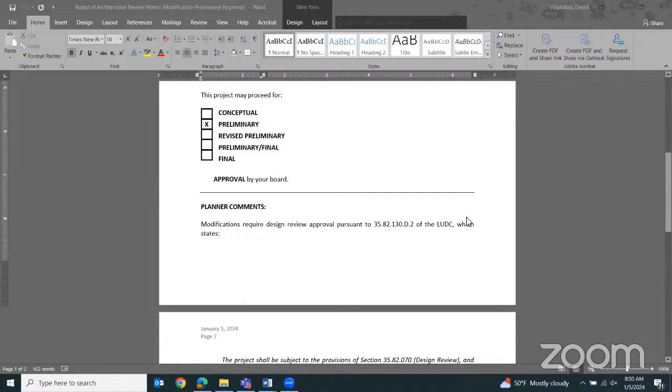There's a memo from Veronica King, the planner, that says modifications require design review approval of the LUDC, which states the project shall be subject to the provisions of the design review section and shall be scheduled to be heard in front of the Board of Architectural Review for preliminary review and approval only before the project is heard by the zoning administrator. The modification, we must make the finding that the modification is minor in nature and will result in better architectural or site design as approved by the Board of Architectural Review. So that's why it's in front of us, even though it's a very minor modification.

Looks like the applicant is here. Brett, would you like to come to the podium briefly? Item C2 is located at the request of Brett Ettinger, the agent for Glazer-Miskulin Living Trust. It's located at 915 Camino Medio, and it's here for preliminary and final on consent of the modification approval.

The previous comments were just in support of the project. So Brett, if you can state your name and whether anything's changed since the last time we saw it. Good morning, my name is Brett Ettinger, Ferguson Ettinger Architects. Nothing has changed since the last time we met here in December.

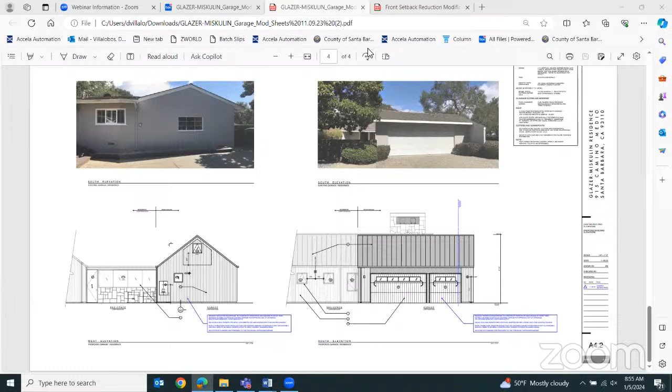All right, and then we'll move on to C3. I would really like Alex to be here for item C1. So thank you, Brett. Thank you, guys, have a nice day. Anybody not here today, you know, David? Hey, Robert.

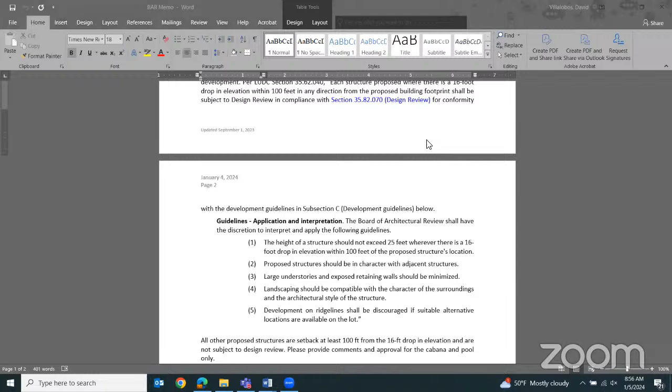So there's a memo for C3 as well. Is the applicant for C3 online? Let me pull up the participants list so I can see when they're there.

Moving on to item C3, at the request of Kate Svensson, agent for Roblata LLC, George Behar. The project is at 4629 Via Roblada in the Hope Ranch area.

It's here for conceptual, oh no sorry, is this incorrect on our agenda? It says final, it says conceptual review, but we already did conceptual review. At the bottom it says may return for preliminary final. I just want to make sure.

Just to jump in, this is Tatiana the planner. It was asked to return for preliminary final on consent, so that's what it should read. Sorry, I can't see the agenda. So it's here for prelim final on consent, and there's a planner memo that we'll read through.

Only the proposed pool and cabana, also labeled as gym and sauna, are subject to design review due to being within 100 feet of a 16-foot drop in elevation, considered hillside ridgeline development. Each structure proposed where there is a 16-foot drop in elevation within 100 feet in any direction from the proposed building footprint shall be subject to design review in compliance with the design review section for conformity with the development guidelines in subsections C. I won't read all of those guidelines, but can you keep scrolling through, David?

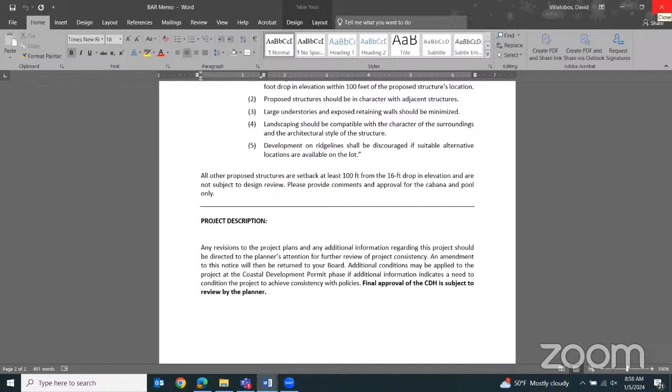All other proposed structures set back at least 100 feet from the 16-foot drop in elevation are not subject to design review. The final approval of the CDH is subject to review by the planner, so we are only looking at the pool and cabana structures.

Alex, we're on C3, and then we'll go back to C1. I just was waiting for you to get here for that one. So the previous comments were that the board is in support of the proposal, and that's it.

Kate, if you could state your name and anything that's changed since the last time we saw this. Kate Svensson, designer for the project. No, nothing has changed at all. We do have Michaela Colvin on the call, and she's the one who worked on the landscape plans for this project as well. If she could also address the landscaping development around the cabana, I think that would be helpful for the board. But the set you're looking at is the exact same set you saw at the conceptual hearing.

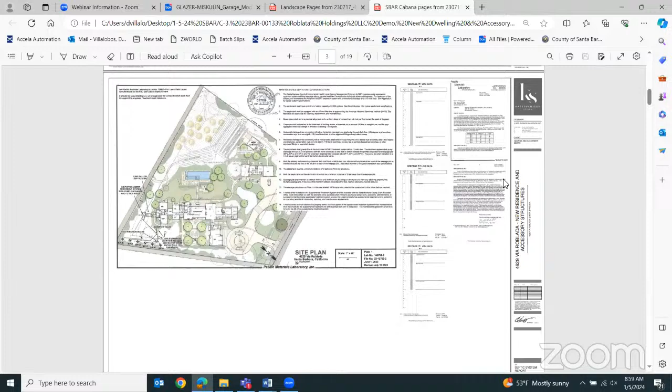Can you direct us to scroll to which sheet has a blow up of the pool and cabana area? I don't know which set you have, I think it'll be towards the end, way down in the set, because you probably have the full building department submittal set in front of you. Okay, I guess I edited for you. No, go up.

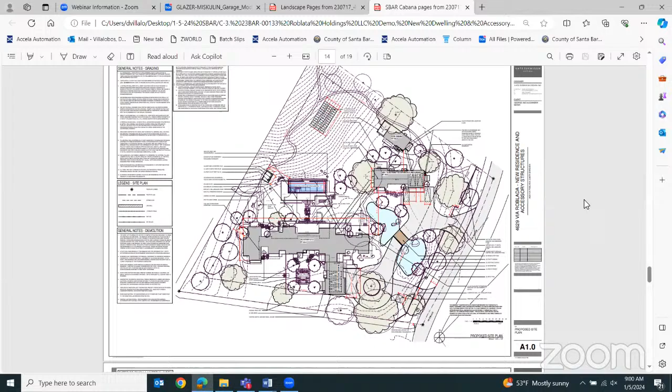So overall, the site plan, you guys can see the pool cabana on the top right of the property, and if you scroll down, you'll see the floor plans and elevations for the cabana right here. The next sheet will show you the elevations, the floor plans are there.

I was looking at the page with the elevation, with the windows, and there were some glass openings. Where do they occur? They all face, you can see on the floor plan, the north and east sides have the two large openings. So the north bifold door faces basically the hill and the ocean, and the one on the east side of the project faces the other structure on the property, which is the ADU. So both of them are away from all of the surrounding neighbors.

There's one with big glass, it says not in window schedule. I think it's on the next page. So the two doors you see on the floor plan right now, if you look on the top right portion of the page, there's two large corner openings. Those are bifold doors, not windows. Right, but these are fixed glass, and it has a truss shape in the frame. That's for the main house only. Oh, that's the main house, okay. Below the floor plans here, you can see the window schedule and the door schedule.

Only ones applicable to the cabana.

I was just impressed by the number of pages on this set. I thought it was like 35 pages or so, but no, we're at 178 for the whole development. It's a large book to read. No, it's well detailed. I have no comments.

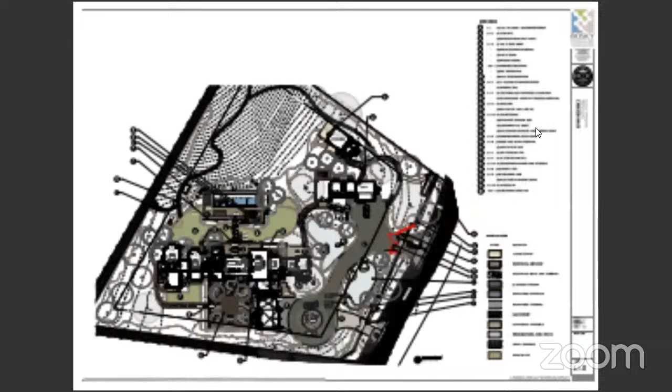Hi, Michaela Colvin with Bosque Landscape Architecture. Could you fill me in what was presented previously? The LUP set, basically, so it's only applicable to the cabana and the pool, but we really only reviewed the cabana because it's within a 100-foot setback. So we're just looking into the area with light landscaping around the cabana and screening for the neighbors.

So we have around the whole property kind of large native screen shrubs, and some oak trees going around the perimeter, trying to densely screen from the neighbors and the street. Down the slope we don't have too much planting, just a Mediterranean and native palette at the top of slope. We have some olive trees in between the cabana and the ADU.

Is there a planting plan here that maybe you guys can scroll to? It should be 2 or 3 sheets below this one. I can share my screen if you don't have it. So you can see at the fence line we have 2 or so layers of large native screening, and then minimal planting in between the ADU and the cabana.

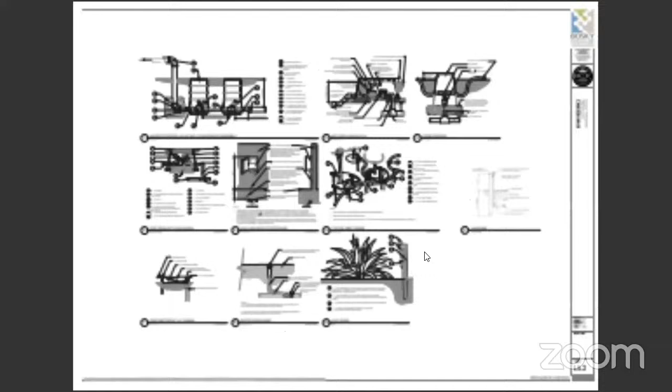Are you proposing any landscape lighting? Yes, just minimal for path of travel. Do you show it on here? We have some on the lighting plan, a couple sheets below this one. We have 2 more irrigation plans and then should be lighting. Here we are, so you might need to zoom in to see the symbols, it's a pretty large plan here.

We'll just focus around the pool area since that's the only part in our purview right now. So yeah, we don't really have much lighting around the pool, just some path of travel lighting to get you to the pool area.

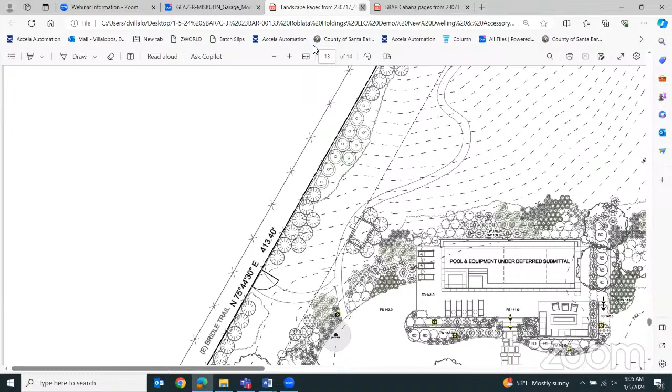Sounds good. Any other questions, Alex? Yeah, I think it all looks good. So we'll give it a final approval in the normal agenda item once we're there, but you don't have to wait around for it. Thank you. Great, thank you.

Okay, the applicant here is... Eva, are you here, or who's presenting? Oh, Dylan, yeah. Hi Dylan, how are you? Good, good. I looked at the plans previously, you made some changes. Can you go over the changes? I know you changed the trellis and the patio and the side walls. Can you show us where they are?

Absolutely, absolutely. So I think the best place to start would be on page 12 of the PDF, which is A2.3, the roof plan. Alex, I really appreciated the comments you made previously, and there are a couple things we addressed based on those comments. One, I reduced the pitches of the roof. One comment was that some of the roofs felt over pitched relative to the design concept, and I appreciated that comment.

So we did revise those pitches. The comment was that there was a flat roof that felt like an addition, so we changed that to a gable, a cross gable. In this lower portion of the screen you'll see we created a 3.5/12 tied into a 4/12 roof on the rear portion of the house. We eliminated the portion of the trellis to the south over the breakfast deck, and just have that trellis coming off of the great room. If you'll go to page 15 of the PDF, please.

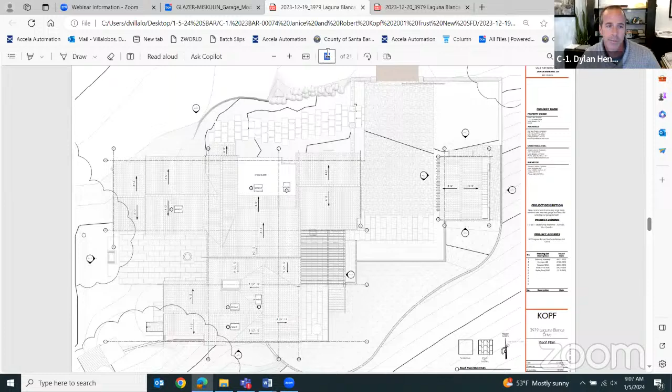This is the rear elevation where you can see the reduction of the pitch of the roof over the great room, the change to a gable at the office area to the left of the great room, and then the revision to the trellis, which is now just over the great room. I think architecturally it works quite a bit more successfully.

One comment from another board member was that the span of the material didn't look like it was working. You can see in the view above, on detail 2 south elevation, we are breaking that span with a cross beam. I've confirmed with structural that the spans on these trellis members will work just fine.

And then for perspective views, if you go to page... Were you going to say something? No, what page are the perspective and front views on? Go to page 2 of the PDF, please.

The lower right perspective view shows best the changes we made to that portion of the project. I appreciate the comments. We made some pretty significant changes, and I think it's caused a more successful architecture. Well done, Dylan.

Was it to minimize and reduce hardscape and side walls? I think you did change the side walls a little bit, didn't you? Yeah, so I'm going to turn this over to Michaela, who's with us from Bosky, and she's going to take us through the landscape drawings.

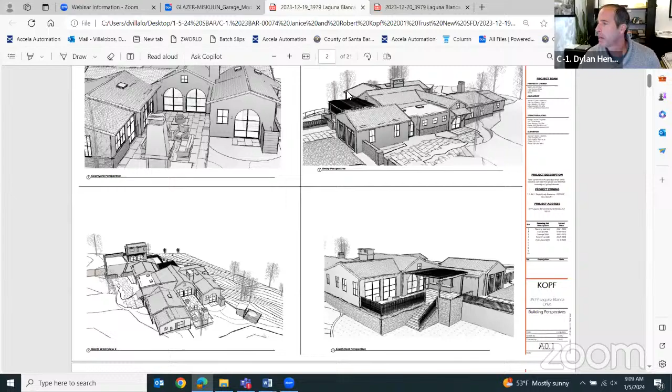They're 2 separate submittal sets. If you go to the 3979 tab to the right on the PDF, up at the top. I'll turn this over to Michaela. Hi. So we are looking for the landscape layout plan.

These look like the civil sheets right now. It starts on page 7. Yeah, it keeps going in the PDF. Yep, there you go. Just go one more down. There we go.

If you look at the curved site wall, we have reduced the number of site walls. We used to have 2, so we've removed the lower site wall and increased the remaining site wall from 4 feet to 5 feet. We've also added some boulders below that site wall to help naturalize the steepness of the grade we're going to be grading, to make that all work. So it's reduced to one site wall at 5 feet high.

At the motor court, we have also pulled in the entrance wall leading to the front door more towards the rest of the motor court, so we've reduced the size of that. And to address another comment about the pathway to the front door, we've now made that permeable stone paving, and we've pulled it away from the existing oak tree.

Good, I was going to ask, this is the landscaping plan, right? Yeah, I think that addressed all the direct comments. Let's scroll through the planting plan.

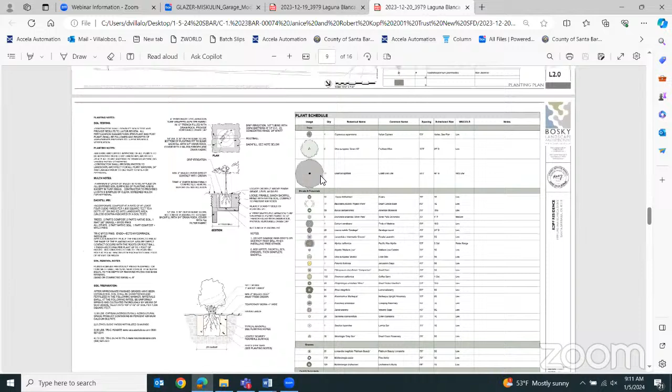Kayla, what shrubs are you proposing at the base of the retaining wall? Let's see, we have some Salvia Waverly, some Muhlenbergia Lindheimeri, some Muhlenbergia dubia, little ollies, some lavender, and also some rosemary, it looks like.

Any landscape lighting on this one? Yes, just some minimal path of travel lighting. Any other questions, Alex? Yeah, I think everything looks ready to go. All right, thank you. Thank you.

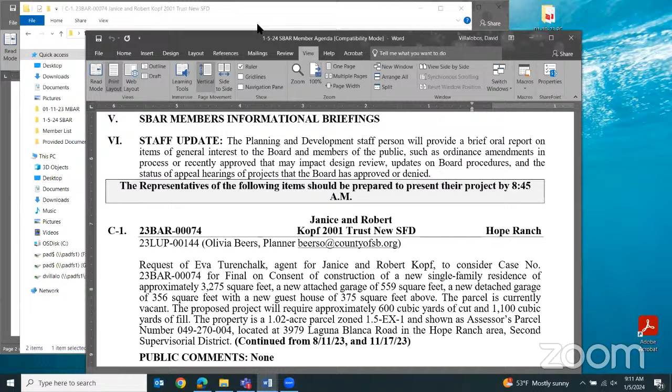Let's begin with item number 1, public comment. Is there anyone from the public that would like to speak on an item that is not on the agenda for today? If so, please step forward. I think we have one. We have one for the minutes, but not this portion. Okay, very good, so that concludes public comment.

Item number 2, elections for chair and vice chair. I nominate Kalie Grubb for chair. Any other, we do them one by one, right, not together? Yeah. So any other nominations for chair? Okay, great. So we can vote. All those in favor? Aye, aye, aye. Opposed? Motion carries. Kalie Grubb is the new SBAR chairperson.

Well done. Okay, so for vice chair, I'll nominate Alex Pujo. Any other nominations? Okay, all those in favor? Aye. Opposed? Motion carries. And I will now turn it over to Kalie. Thank you all for the last 3 years. Thank you, Chris. Thank you, Chris.

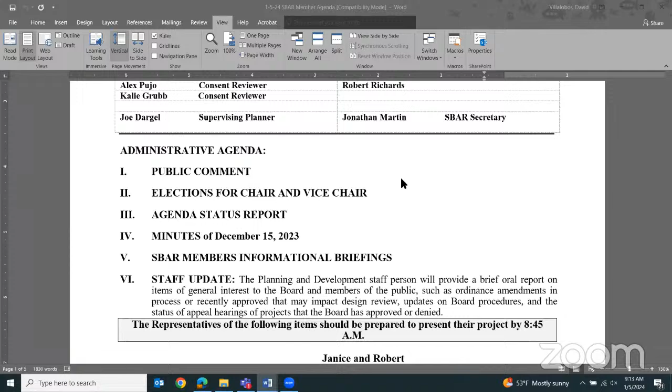All right, we'll move on to reviewing the minutes from December 15th, 2023, and we have one public comment or request to speak, so we'll hear that before we do the review. Would Michael Guten like to speak?

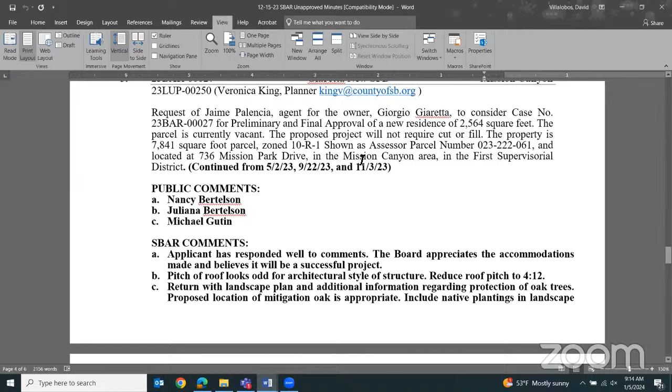I think you folks remember me, that I've attended all the meetings before. I'm concerned about the large house that's being built 7 feet away from my house.

I have some comments about the last meeting I'd like to make. Prior to your voting today on whether to approve the minutes of that meeting, which include the preliminary conceptual design review of agenda item number 5, I'd like to make the following points. First, agenda item number 5's unapproved minutes refer to this project as preliminary and final approval, but that is incorrect, as this project was only being heard for preliminary conceptual design approval, not final approval. I'd like that changed in the minutes, if you don't mind.

The applicant surprised everybody at the 12/15/23 hearing, including the SBAR members, with a revised set of plans dated 12/4/23, which were downloaded right at the hearing, which no SBAR member or any of the public had any opportunity to adequately study or comment on.

The 12/4/23 revised set of plans changed the roof shape from a hip roof to a gable roof, with a pitch from 4:12 to 6:12, and a height from 23 feet 5 inches to 25 feet 4 inches, which made the house even taller than before.

The result of the change in roof shape, pitch, and height is more shading of sunlight and blocking of views from my house and backyard, and a more overshadowing presence of such a large 2-story house erected just 7 feet away from my much smaller single-story house.

In the previous set of drawings, at the request of the SBAR and affected members, the roof shape had been changed to a hip roof from a gabled roof, and the roof over the master terrace on the 2nd floor had been deleted completely.

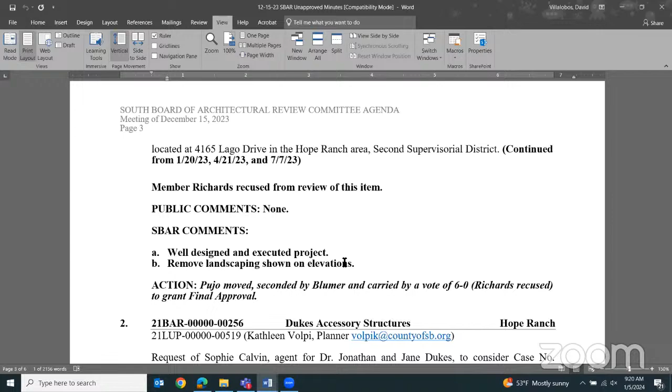Item C1 was continued. Does anyone have any revisions to item 1? Item 2 was continued. Item 3 was approved, will be approved as a consent item today. So that's item 4.

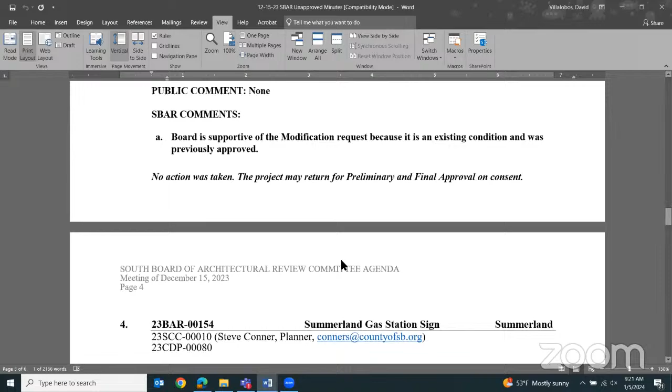I think on number 4, I don't know that the comment was that the light spill wouldn't occur beyond the property line. I think it said it wouldn't negatively impact the neighborhood. There's going to be some light spill coming out of any lights in a canopy. I think it just says demonstrating what light spill will occur. Okay, I agree. Anything else for 4? No.

Item 5, wait, oh, non-trip material. That wording, okay, you think? I digress. Yeah, non-trip is a little... yeah.

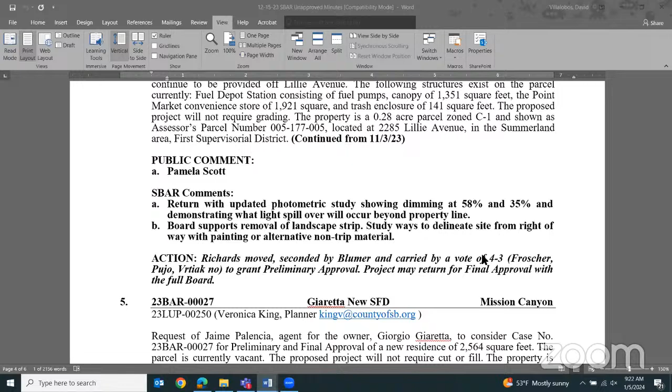All right, reviewing item 5. I'd just like to confirm that the plans we reviewed were submitted to the planner as part of the record. Which is part of the...

Just for item C, increase width of planter for hedge to 2 to 3 feet. I don't think 2 to 3 feet was said, I think I said a minimum of 3 feet. Increase width of planter to a minimum of 3 feet. Yeah, and it also went along with the decking - it was to reduce the amount of decking in order to accommodate the increased width and provide better privacy screening, and that was along both side yards.

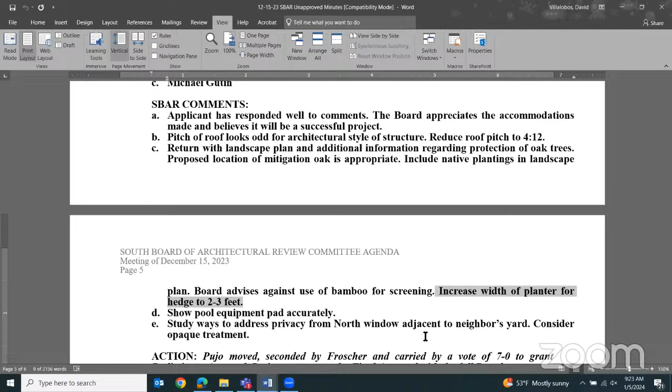Mr. Chair, I have a question. Our typical policy is when projects are agendized for any kind of motion, like a preliminary or final approval, that we don't accept plans that haven't been submitted properly. So I'm curious how we got to that on this particular project. That gentleman spoke about it, and I'm reading the minutes and seeing we had it agendized for a possible motion for preliminary approval, and then we took in plans at the last minute. That seems inconsistent with how we've operated in the past.

In that hearing, if I remember right, the plans had been submitted but the planner hadn't put the correct plan set in the box. I'd like to confirm that, I wasn't there so I'm not sure. Yes, Madam Chair, I could jump in here. The planner was out during that hearing, and I was aware of the plans that had been submitted, so we allowed them to provide the plans because we didn't have access to them at the moment, but the applicant had submitted those plans.

So they had been correctly submitted, but we had not had time to previously review them. So were they available to the public after they were submitted? Yep. And how many days before the hearing was that?

They would have been made available to the public if the public had requested them. Yeah, just like a standard practice.

Okay, and that was prior to the hearing? That's correct. Can you estimate how many days prior? I believe it's 7 or 8 days prior to.

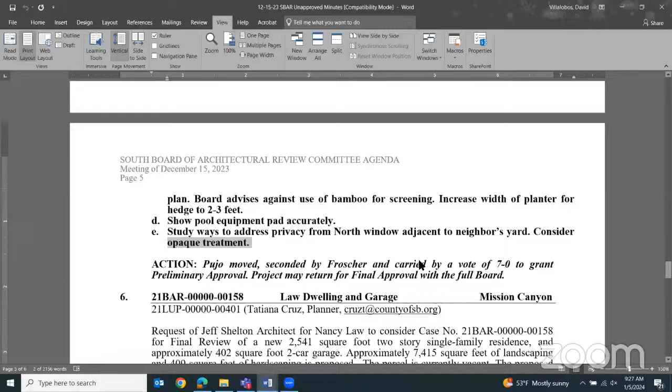Okay, I'd also like to go back to item 4 real quick. When we discussed the removal of the landscape strip, this is item B, we also encouraged the community of Summerland to, I guess, yeah,

I see a bench, right? Is that what you said? Well, something like a planter in the right of way, to encourage the community of Summerland to petition the planning commission to have something sort of barrier placed. Yeah, barrier or planter in the right of way, because it's outside the applicant's property.

So that was just one of the things that we talked about when we supported the removal of that landscape strip. We still thought there was a safety concern. So, for what it's worth.

So the idea was to petition, it would be Public Works. So what would be the process for the applicant to do that? To get an encroachment from Public Works to add the planting strip. The sidewalk was wide enough, was like 8 or 10 feet.

Sidewalk was wide enough, of 10 feet, and we thought like a 2 or 3 foot planter. I don't think it would be the planning commission. I think it would be an encroachment, right? From Public Works, I imagine.

As far as our comment goes, we just encouraged, we made a comment that wasn't really directed at the applicant, for a solution in the right of way. Yeah, it's encouraging the community to take matters into their own hands. Yeah, so I don't think we have to clarify what agency it goes through.

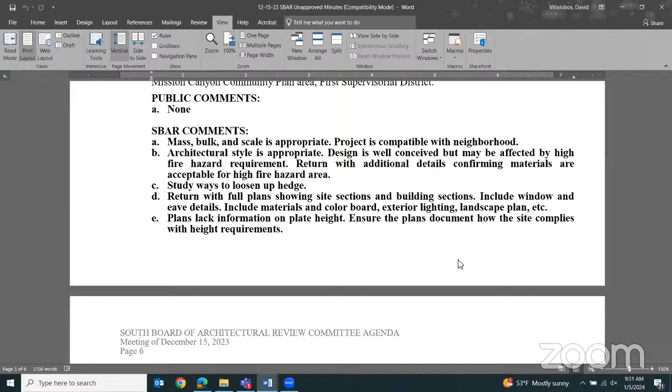What is loosen up hedge? As a landscape comment, how do you loosen up a hedge? By forgetting to prune it.

I can't say it's my project, but I understand it. I think the comment was to informalize the hedge so it wasn't in a straight line, so maybe use staggered planting instead of a straight line of planting. They study ways to make the hedge less formal.

I think for item 8, the comment was to consider addition of a deck and reduction in height of wall. I was just making a recommendation that the applicant could consider using a deck and a railing system instead of the walls to try to accomplish getting that outdoor space. So maybe it should be consider the use of a deck and railing system as opposed to the retaining wall system.

It seemed like it was an inefficient way of trying to accomplish the outdoor space to me, as an alternative to the retaining wall system. Did you get that, Joe? Yes, I got that. Is there no other changes?

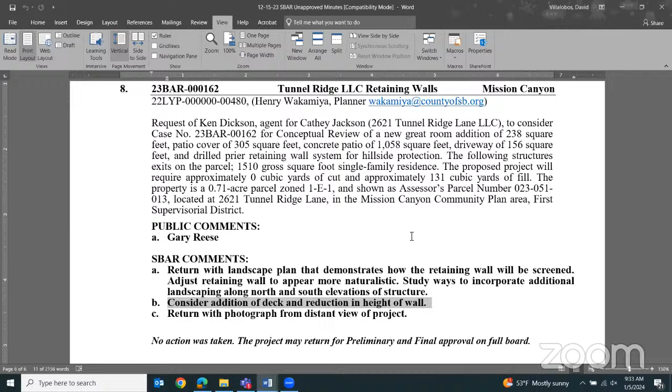SBAR members and informational briefings. I do as well. We'll be efficient today. Anything else? Welcome to the new year. And then staff update. Nothing from me, but I just wanted to take the opportunity to remind our board members to make sure to speak directly into your mic.

Okay, so moving on to the consent items, they were reviewed and all consent items were approved as submitted. Is that the motion? Just before you do that, I actually was thinking something. I have a question for Veronica. She's still online. I think so. Veronica, are you there?

So my question for Veronica had to do with the modification. My question was whether or not it had actually gone to the zoning administrator yet. I believe she's asking for preliminary action for the modification, but it's agendized for preliminary final. So my question was, should the board be giving final before it goes to the zoning administrator, or should we wait to give final until after zoning administrator action?

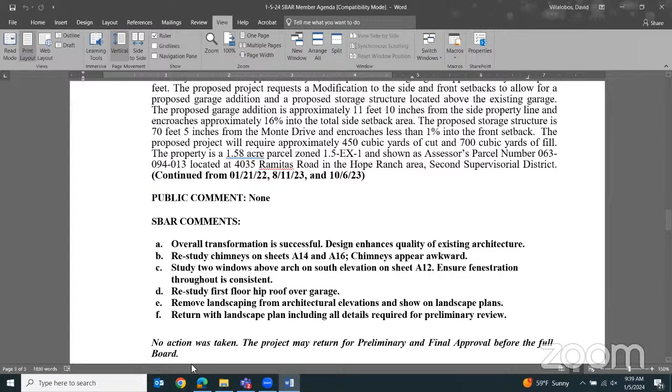Our previous comments: it was previously heard on October 6th of last year. Overall transformation is successful, design enhances quality of existing architecture. Restudy the chimneys on sheets A14 and A16, chimneys appear awkward. Study two windows above the arch on the south elevation on sheet A12, ensure fenestration throughout is consistent. Restudy first floor hip roof over garage and remove landscaping from architectural elevations and show on landscape plans. Return with landscape plan including all details required for preliminary review. And it's here before full board for preliminary and final review.

Quick question, Madam Chair, this requires a modification too, right? Is there a planner memo on this? So do they need, can they get a final before the modification, or was it already granted? Can we say that? Who's the planner on this? I don't see Kathleen on. Is there a memo? I don't see Kathleen on either, and I can take a look really quick to see what the status of the modification is. Okay, thank you, Joe.

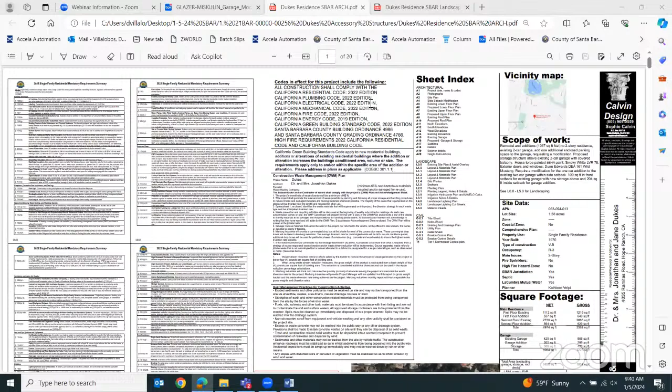So Sophie, go ahead and state your name and how the comments were addressed, and then we'll come back to Joe with where we are with the modification. Okay, let me just let you know the first few pages are mostly floor plans, so we could just run through those. The pictures are good to see, just to get everyone to remember what this house looked like.

And if we just go down to the next page, I think if we go down to items 14 and 16, we deal with the chimney and then the windows, and then we're done. We don't have to really review the rest. Okay, so the best thing to do then is to start on A12.

Yeah, okay, that's the windows. So, can you see my marker? No, they can't. Oh, they can't. Okay, so on the far left of the page there is an arched window with two small windows above. That is the entry to the main residence, and you'll see that on a second elevation too. So what we've done is those two small windows up top, closer to the roof line, have been reduced in size because we wanted the exterior plaster to be shown, and we thought there was a better sense of scale to those windows in that roof line area.

Next page shows the other side, which is kind of consistent, right? Right, so the windows are the same size, right? They are both the same size, they're just on two different elevations. Okay, how about pages 14 and 16 about the chimneys?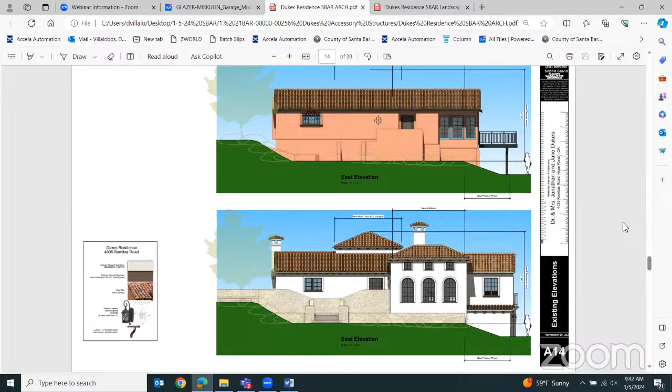Where's that elevation of the chimney, I guess it's on the next page. Let's see. Yeah, so that's the existing garage as is. If you go to the next page you'll get more information. A16, the north elevation, there's an addition to the garage, the one off to the left of that garage. Just to go to the meat of the matter.

I think we made a comment about the chimneys. They looked like they were sticking out of the building and we thought they were awkward. How did the chimney change, I guess is the question. It used to be fatter and have tile, wider and fatter on that chimney, and then there was a placement of tile in it. It actually wasn't just a straight up and down column - it widened at the bottom, and then the client wanted a tiled insert. We all thought it was a little busy, so we thought this was a cleaner look, and the client really loves it.

And it's not a fireplace inside, it's just aesthetics - it's been changed. So there's no fireplace.

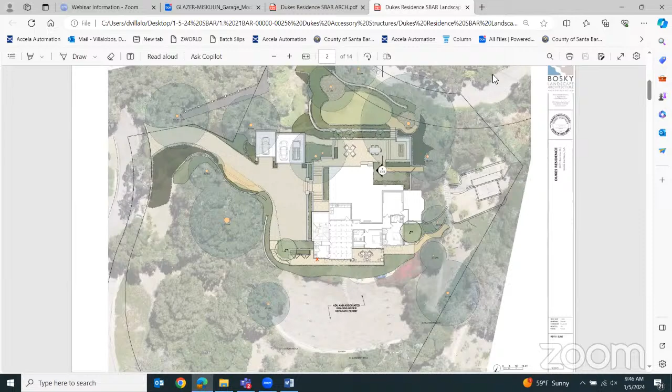Okay, so this is the backyard where there previously was a pool and pool cabana. We're showing some Oklahoma stone hardscape outside of the new addition or new improvement areas and some landscape areas. Next sheet, please.

So the backyard has not changed at all - mostly planting improvements, hardscape improvements, a modest lawn. We previously had a tree report, an arborist report, that has not changed. We're mostly changing like for like, so all the trees you see adjacent to hardscape, there's currently hardscape there. Next sheet, please.

So the driveway, modest - yeah, we're replacing the driveway and creating a small bump out. Next sheet, please.

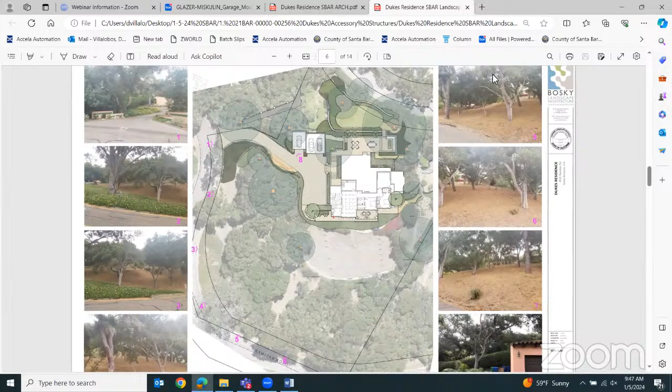These are just some site photos, you guys have probably, I think you maybe remember from last time, but it's really well screened from Ramitas Road, lots of large mature oak trees. These are various vantage points - the top left photo is kind of the best vantage point of the house from the street. That's the entry. We're removing some site walls that are kind of outdated and replacing them with some updated plantings. And you can see the garage there. Next sheet, I think we can get into landscape plans that were missing from the last set.

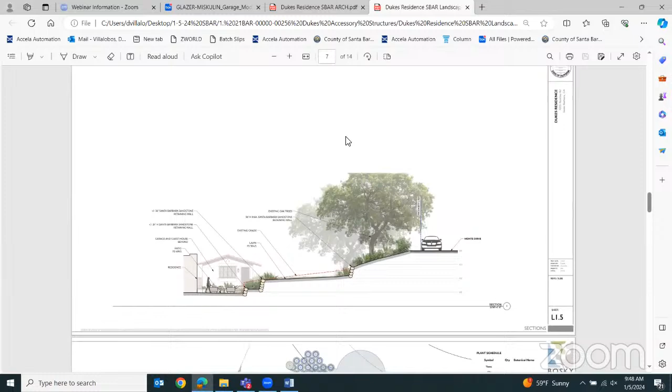Yeah, this section has not changed, but this is the backyard showing some modest grading with some retaining walls. And here's our overall planting plan.

Yeah, just very Mediterranean, typical Santa Barbara palette. But this has not changed since the last meeting.

And then I think we can get into lighting the next couple sheets. Sorry, that's just the landscape details and water use calculations.

If we keep going down, there should be a lighting plan. There we go. Yeah, so very minimal lighting, some step lights, path lights, a few hanging down lights from the oak trees. And that concludes the landscape.

Thanks. All right, and Sophie, does that conclude your presentation?

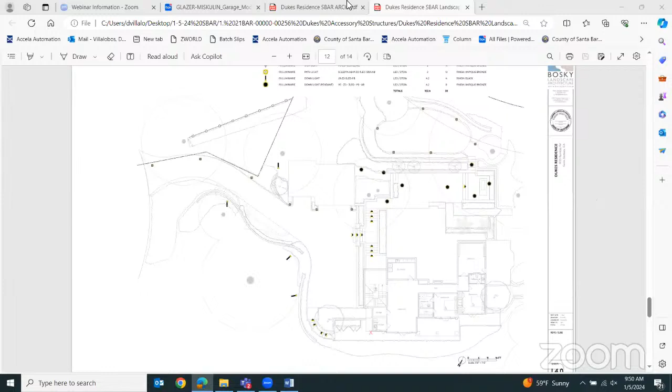If you can go back to the item, page 16, I think that chimney could have another look. It just looks a little bit awkward as an ornamental piece. Anyway, it's just a suggestion, but the approval is for preliminary approval.

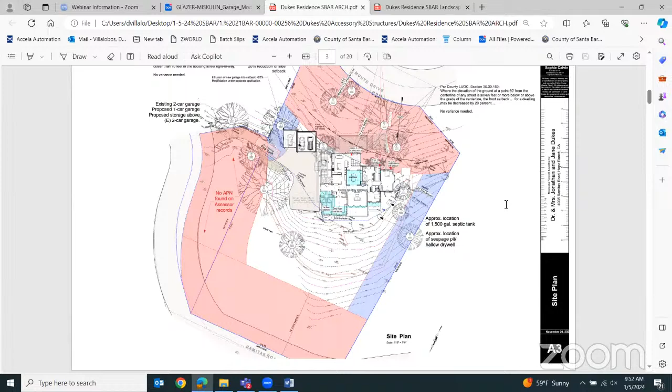Oh yeah, good catch. I don't know the official process of how somebody goes through that, but we're given approval to somebody. Is that, David, can you zoom into those two garages?

Spot that's on a neighboring property. The landscape plan doesn't show it, so maybe this is just - I think at the previous meeting they said it's always been that way, so maybe it's just allowable, but... so the question is, is that allowed?

Joe, you want to speak to that? We have the planner, or does the applicant have any insight? I mean, it seems like they've got a hedge on the landscape plan, they have a hedge behind it, so it's almost like it's kind of been borrowed property. Anyhow, I'm not trying to make a problem for it, but it should probably be documented appropriately.

You're talking about that turnout right there? Yeah, the question is, is it allowed to go beyond the property line? When we're given approval to the driveway across the property line? Yeah, right, so we need clarification from the applicant because it's not shown in the landscape plan, but it is shown here. So which is correct?

We believe that is correct, that it does cross the property line. It has always done that. It also crosses the property line at the street too.

Sorry, who is this? I'm Michael, I work for Sophie. Okay. We're both in that meeting - is that turnout a requirement for fire access? The way it's dimensioned, I don't think so. But the modification was that blue area.

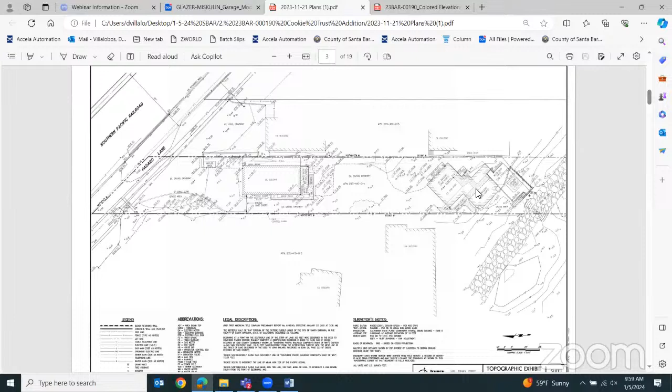On the left you can see an existing 763 square foot guest house. No changes are proposed to the guest house.

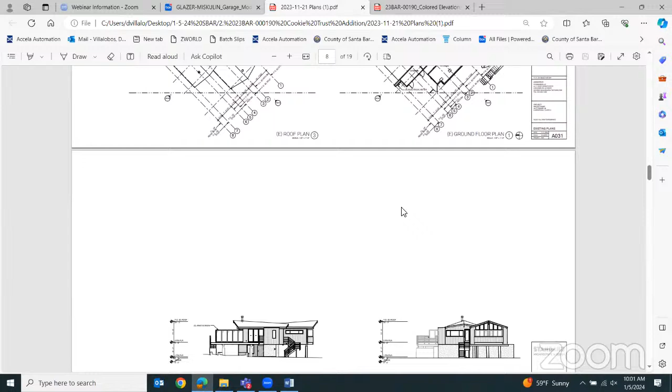These are the existing elevations, which we also maintained. You can see the flying roofs, which open up—rotated—to the beach and to the courtyard with large fenestration, while toward the neighbors and the property line there are only smaller clerestory windows, most above eye level for privacy.

This shows that we keep all the exterior walls of the existing residence and are only proposing an interior remodel. This is the demo plan.

This is the proposed site plan. Again, you can see we're adding two volumes to the existing two volumes of the main house on the right side. You can clearly see the 5-foot and 3-foot setbacks.

The four red triangles show the encroachment Steve pointed out earlier—the same encroachment as the existing volumes. We were really careful, wanting the new roofs to have the same proportion and slope. They're slightly angled, so to achieve the same architectural style we had to keep the volume the same width and about the same length, maintaining the style of this beach cottage—hence the encroachment, really just to preserve the architectural style.

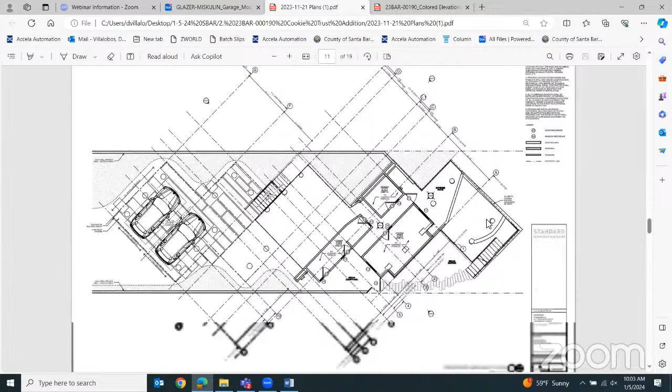So this is what I pointed out—large windows facing the beach, very small windows facing the neighbor. If you go to the next page, it's the same thing.

On the second volume from the right, bottom, that's the air conditioning unit—it's fenced in and elevated to the second floor. So the entire addition is on the second floor, with piles on the first floor.

Keep scrolling—yeah, these are just interior elevations and finishes. Yeah, that's it to look at for those.

And here's the preliminary landscape plan. Does that conclude your presentation?

Yes. I would just add quickly that, as Sylvia mentioned, we're on piles and elevated. We have to be elevated above a certain floor elevation to meet flood control requirements, which is why the air conditioning is elevated too.

All right, any questions from the board? Yeah, materials—are they matching existing, or is it wood siding, horizontal lap siding, what is it?

Thank you for the question. The existing main house has vertical wood siding, about 6-inch vertical boards. We will repair those and paint them white, keeping the same siding, and put new windows in because the old ones are worn out.

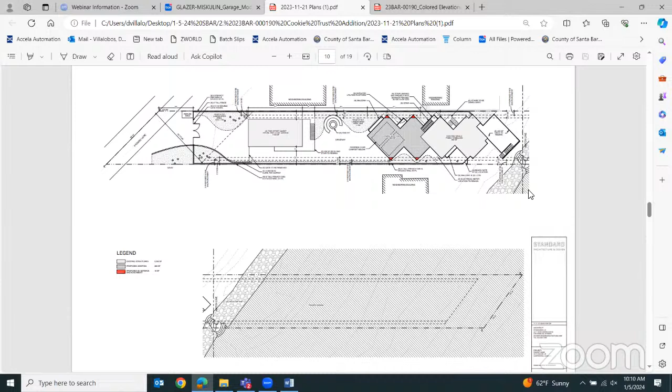I think I agree with Josh. I think you're on the right track architecturally. I'd like, and Robert too, I'd like to see a lot more development of the landscape, both showing existing conditions versus proposed, and flesh out what the proposed planting is. I think it's an awful lot of DG, not my favorite material. You might consider incorporating some other flat work, permeable pavers, whatever it is, to break that up here and there.

The fire pit, I'm a little confounded by. I'm not sure that's ever going to get used, considering you're basically in the driveway. I'm kind of wondering what the thought was there on that location versus, maybe out by the wall by the beach or something might be more appropriate. Also the scale of that looks pretty large. So I would encourage you to get a landscape designer or landscape architect on board to really key into the whole site.

Okay. Alex? I have nothing to add, I agree with all the comments. John? I think that...

John, you might have to share. I think that wireless one is not working. Come on over.

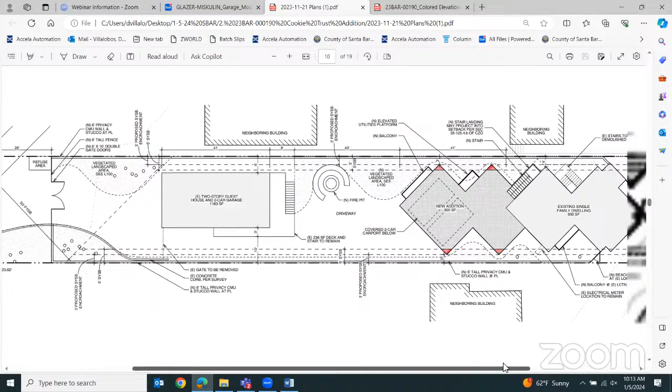you would just look directly at the neighbor, and then the other way around to the courtyard. The first new addition has a large opening, and then the one at the stair currently already has a large opening, but the other two are closed off to the neighbors. So, could we go back to the elevations?

And have you had dialogue with the neighbors regarding this? It's hard for us to tell, looking at this today, how much it's changing, what the existing condition is of what would have been open space to now structure that's very close to other buildings. So, Val, if we don't have enough information about the neighboring property, would you want to just make a comment that you'd like to see clearer photos of how that'll impact for the next review?

Yeah, I think that can be turned into the comment. I like what you're doing in terms of the architecture and the way you're working with the existing beach cottage nature of it, but you're asking for a mod, so we need to understand the relationship to the neighbors, and typically beach houses always create extra impact.

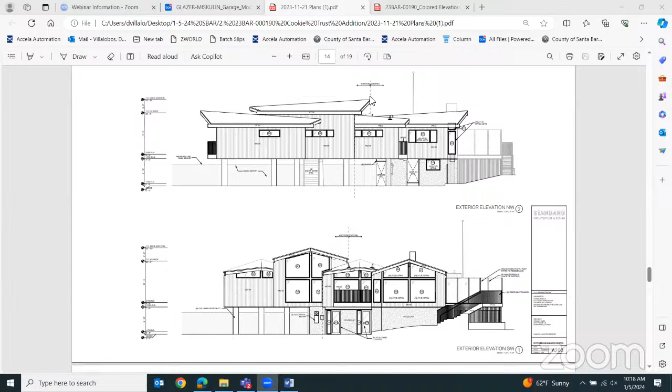All right, item 3, the Akhavein Family Trust Pergola, at the request of Stacey Isaac for the property at 3860 Sterrett Avenue in Eastern Goleta Valley area. This item is here for conceptual review for new hardscape, front entry, steps and wall, new fence along the property line, a 280 square foot pergola, new gas fire pit, and renovated landscaping of 225 square feet. There's an existing residence, garage, guest house and trash enclosure.

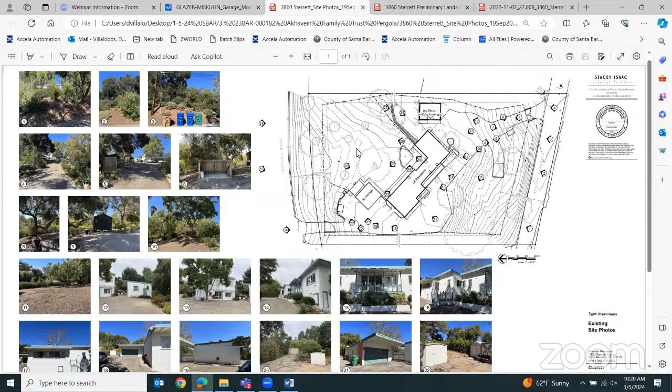Stacey Isaac, landscape architect. So this is on the backside of Foothill Road, it abuts it as you can see, but you enter it on Sterrett Avenue coming up from the photos. It's really up on a hill, and you can see a lot of it is screened. The only shot that you can really see of the house from the road is number 5, that's about the closest that you can get.

This is the first part of what they see as like a 3-phase project. A lot of this right now, this house had no construction documents on record, it was built mid-century, kind of strange, so we're just trying to take it through the process of getting it first into conformity. You can see there's a lot of things about it that need work, but with limited budget we're just trying to address the first stage here. They'll be tackling architecture next.

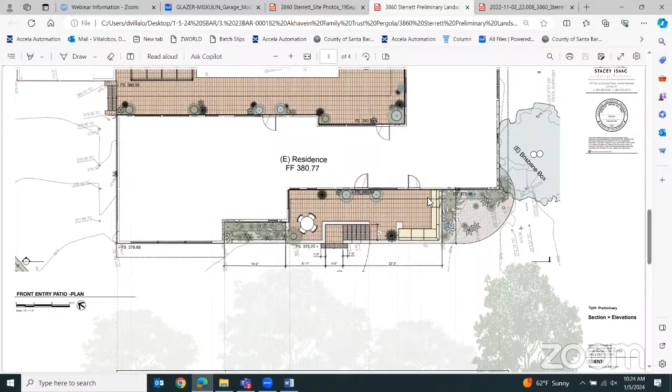You could scroll so I can see. There you are. So yes, it looks like a high wall because of where the entry is, so we're making it a little bit higher because they'd like to be sheltered from the weather, with a raised planter where the old deck was, just going to seal off that entry altogether. And then this is just going through now through the living room and up, and doing a little bit of garden work right here on the front to just sort of soften the wall effect.

And then in the back, if you go down, there's an elevation of it, just a simple steel pergola and fire pit. Is there an elevation of the new gate? We don't have a new gate. Oh, it's an existing gate, it's just moving it out. Okay, it'll be just wood style, 6 feet tall, simple along Foothill Road. And there's a lot of planting that exists still between the property line and Foothill that we will not touch at this point, unless it's for fire. And that's it, that's all we're doing.

Thank you. Any questions from the board? Yeah.

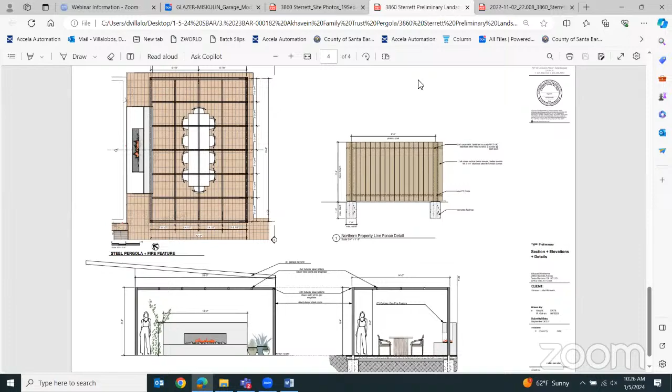The shed, can you go to the site plan, David please? See that shed? The one that's getting removed? Yeah, is that driveway remaining? For now it's remaining, eventually it'll go away. Okay, so this would, what - that's just a vestige of what was there when they bought it. It'll be an overflow parking area for a while, and then nobody uses it. Okay.

All right, and then is this accurate? I mean, you basically have a lot of driveway. Is that existing? Right, is there any plan to sort of soften it up against the house? I mean, it's outside of the work limits right now, but eventually, yes. And also up by the house, our eventual plan is to go with all chip seal and definitely reduce the hardscapes.

Okay, but so this is phased. But it's phased, so we're only at phase 1. Okay, limited funds - they're really saving their money to do the house. Okay, that's my only question, and that'll get done with the house.

Yeah, I have a question. It looks like the driveway approach is right next to the entry wall, the new entry wall. Is that true? Do you have room for landscaping?

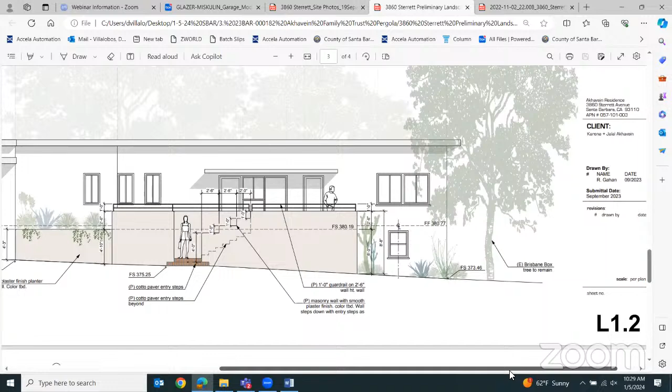And that's where the lounge is, where they'd be seating. It's just built in. 8 feet 9 inches to the top, is that right? Yes. You come through an opening, that drawing's a little strange. Can you zoom in? You can see it in the plan view. The wall steps up typical Mediterranean style. I see. Okay, any other questions? Oh, and you have an extra 1 foot of railing on top. Yeah, to meet the 42-inch standard.

Were you planning on planting on this pergola? Oh yeah, we'll put vines on it, most likely a wisteria. Is there a reason you didn't bring the railing down away? Because they wanted more protection from the wind on this side since there's a lounge there. I can't bring the railing down in order to protect that corner. Okay, so we're keeping it consistent. Any other questions? Would the vine survive on the steel? Oh, easily.

Not for a wisteria in Santa Barbara, it'll be fine. They'll shade the steel, cooling it. Are you in a high fire zone here? We are not, surprisingly, because we're south of Foothill. Make sure with the... okay, crazy, I know. Trust me, I think about it.

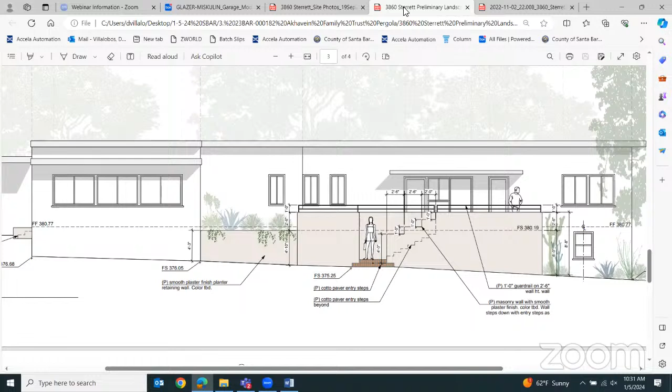Okay, so if there's no other questions, we'll open for public comment. I didn't see any letters in there. Is there anyone in the audience? No request to speak on this item. Okay, so we'll begin with comments, starting with Val this time. Go back to the plan view of this entry and wall. Can you zoom in on that?

Now, for the drive-through, I guess I need the site plan, or something where I can see what the car is doing. But you have parking beyond. That whole wall design feels very harsh and difficult to me.

You've got so much paving on this site. It doesn't feel like the best solution to how to make a better entry. But there's so much car traffic. So you have entrance from the upper right, entrance from the lower left. The primary entrance is the upper right.

And is there a garage? There is. Is it next to the two cars on the left? Yes. So the primary home use would come in from the left? No, they come in from Sterrett and go all the way, passing the front of the house, and go back to the garage. Can they use the left side instead? They don't. They really only have that as an emergency egress onto Foothill, because the traffic on Foothill is so fast it would be very dangerous for them to stop and pull in.

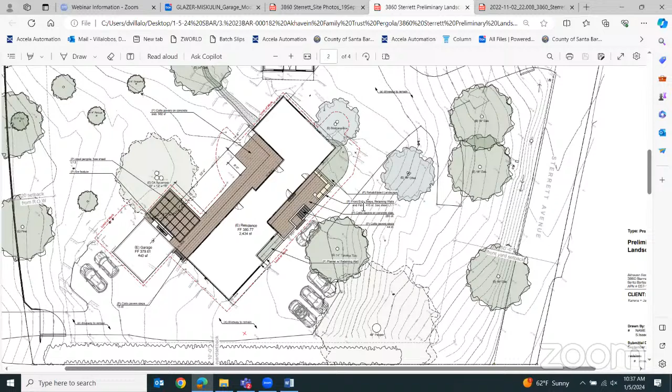But I mean, you guys have already talked about it, I would just say I agree with the previous comments, that there's so much paving and it would be a great opportunity, for very little money, to help — especially out on this corner, which is the main view from the public right of way. Seems like you could really get significant planting there. And beyond that, I agree with Val that this wall, almost nine feet, is just super stark. Obviously you're limited with how much space you have there, but even if you added a couple of vine pockets to train something up on that wall... is that south facing?

But yeah, it's like walking up to just a big blank wall at your front door every time. It seems like there could be a softer solution, let's say. And I think that's pretty much all I would add to what the previous comments were.

Okay, thanks. Josh? I'm not struggling with this too much. I think it seems like a reasonable proposal, so I don't have anything significant to add to the discussion. Just trying to think of any comment I have that's different than what's been said. Anyway, I generally just think it's a supportable and reasonable proposal.

Robert? I think the backyard seems nicely proposed. The trellis and fire pit seem like a great space. One thing I would suggest looking at is potentially, if any of the paving around the house back there, if there's spots to get planters in against the house, that's something I always try to encourage. I see you had some pots back there. Maybe the owners don't want to have planters, but anyhow, you look at that.

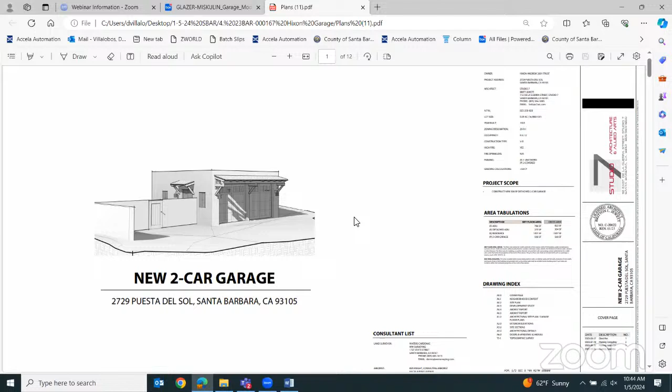There's an existing residence, ADU, and detached ADU, a small one at 273 square feet. And there's no cut and fill proposed.

So if the applicant can state his name. Hi, my name's Brett Jewett, I'm the architect. Basically, what we're going to do is present a new 500 square foot detached garage on the property.

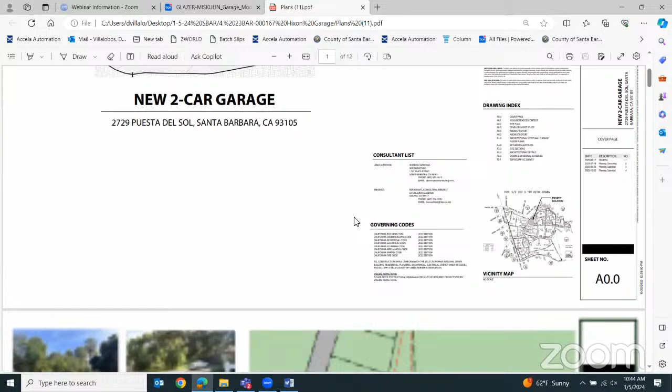It's an impacted development opportunity on this site because of the existing oak tree and different setback conditions that we have. We're looking to focus on the footprint and site plan today, showing impacts to the neighbors and the existing landscape, so that we can go before planning and ask for a modification to the front yard setback.

So if we look at sheet A0.2, this is the site plan. You can see that the lot has more trees than the neighbors, and so the development opportunities are really limited.

The photos from the site itself show that there are a few existing specimen trees there. There's a cactus that we really like, and some larger oak trees. And then there are some smaller oak trees too.

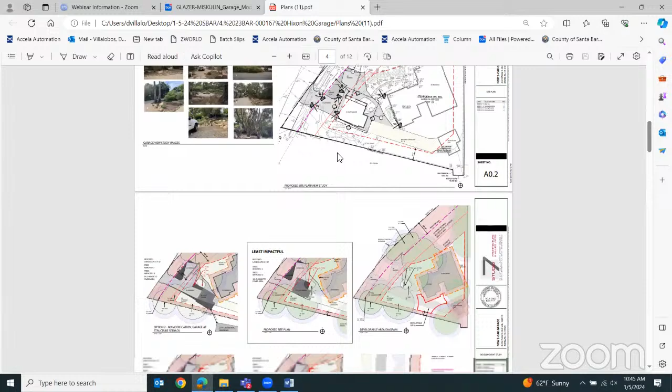So we can go to the next sheet, sheet A0.3 please. This is a diagram that shows the different types of limitations that we have. We have 3 setback limitations. One is property line setbacks.

The only one that we can really violate is the front, where we can go to 13 or 16 and a half feet from the right of way as an encroachment. There's a building-to-building setback that we cannot encroach on. And then there's also oak tree drip line setbacks that we have some opportunities to encroach on with the proper mitigation.

So what we look at then is how to move the footprint within these different setbacks. And as you can see, there's 4 studies to the left there. The least impactful takes out 2 trees and requires mitigation for 3 trees.

The other 2 or 3 studies are showing the garage in different locations as we push the limits of the side yard setbacks and front yard setbacks. The 2 lower studies would require the driveway to be relocated, and because of its proximity to a T intersection, that's not really an option. So the backup distance on those are less than 25 feet.

So what we're seeing is that the least impactful has 2 trees removed, 9 trees impacted. The next page is the arborist report that goes through the impacts of that proposal, with remediation being 3 boxed 36-inch oak trees to mitigate that proposal.

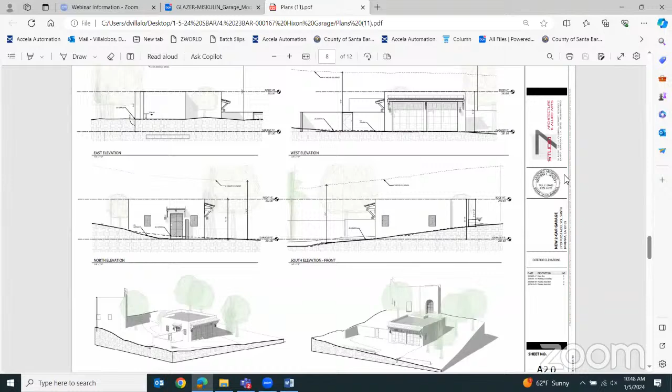And then we'll have an opportunity to enhance the plantings in front and give a reason for the sort of walled entry that we're creating. So go to the next.

Okay, thank you. Any questions from the board? I have a question: how much does the grade change between your garage site and the road? Because you can get a bonus to encroach on your front yard if there's a 7-foot drop.

It's not 7 feet. No, I'm aware of that, but yeah, it starts to pick up slope as it gets to the back of the lot, not the front. On the other point, is there sufficient room to turn around so you can approach a street in the front instead of backing out into the road?

Well, not really, because you've only got 16 feet. Would you have to back out into the street? Yes, unless we did a paved area to the right where you would be able to pull out and then back into the right side, and then you could go out. But we're trying to limit the amount of paving. There's also a specimen cactus over in that area, and the street is a private street.

It's not heavily traveled. We'd like to do that, but I feel like it's a heavy ask considering the amount of paving and the impact to the trees. Any other questions? So the paving on the left, is that necessary? Yeah, that's existing paving there, and what it does is it ties into the pathway that goes to the front door. We feel that's where a guest would park, so they wouldn't be directly behind the garage door.

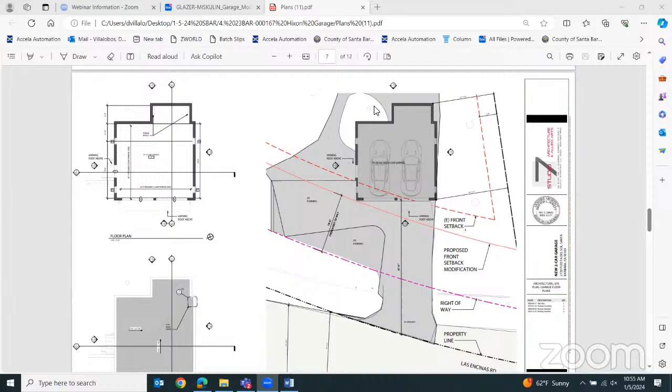I think the architecture itself is reasonable, and mass, bulk, scale, neighborhood compatibility and architectural style all seem fine. Detailing seems fine too. My only concern is the effect on the neighborhood, as usual, just maintaining safety and consistency.

I don't know if any standards exist in the county, but I am aware of the ones the city produces for driveways, where they have a 10-foot by 10-foot triangle area that must be kept clear of vegetation or landscape material beyond a certain height, to maintain clear visibility backing in or out of a driveway.

I think I'm right about that, David. There isn't a standard in the county for that, is there? I believe it's 42 inches, right? That's the city standard. I don't know if the county has one, but anyway, I would use the city's standard.

I think it's adequate, and I would like to see that documented on the next round of plans to show a clear visibility area, somewhere in the neighborhood of 10 feet on either side, so the builder and landscape contractor have good direction on what not to put there, and the homeowner is clear about keeping that area free of blocked views.

So I think that's a reasonable request, but I'll leave it to you to figure out how to make that safe. I don't want to make too much of a note of it. Joe, maybe you can fashion that into a concise comment about documenting a way to maintain clear visibility to the public right of way on the driveway.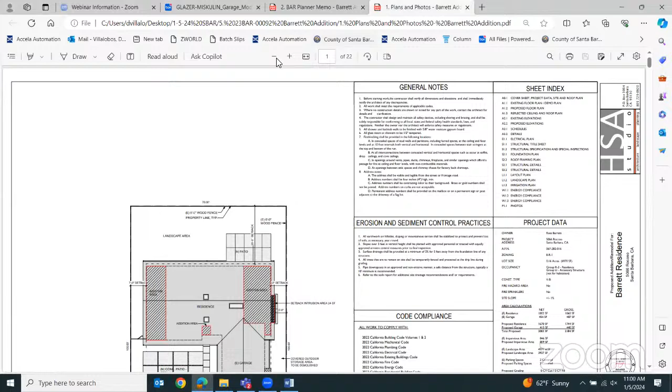Would the applicant like me to read the comments before the presentation? Sure. Okay, so: simple and low impact project, return with a landscape plan for the front yard, return with exterior lighting details, materials and colors, and provide gate details. So you can focus your comments or responses around those.

Okay, please state your name. Thank you. Right, so this is a pretty modest project. Nothing in these plans has changed since you last saw it.

If we want to move down to the landscape plan, we'll keep going through these. Yeah, it's at the very end. Okay, there we go. So this is the layout plan. We're going to be replacing the driveway with a new concrete driveway, and also doing a concrete patio inside the courtyard and a new concrete walkway, sand finish.

And then the patio will have gravel infill in the joints, just to make it a little bit more permeable and loose. If we go to the next sheet.

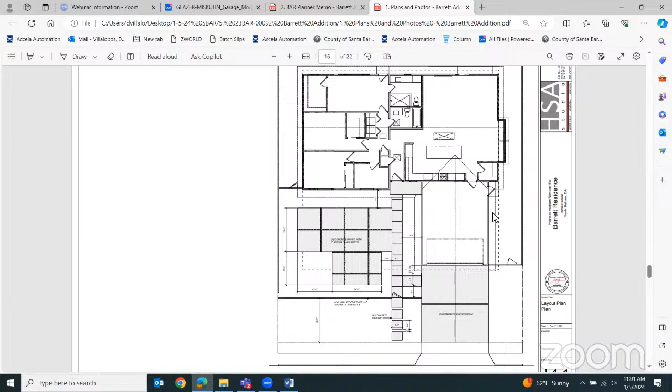So we have some citrus trees and grasses in front of the fence and gate. The owner has a very large vegetable garden and likes some of his landscape to be productive. And then we have a big olive tree in the corner on the interior, and a bunch of drought tolerant landscaping that's pretty loose, a lot of grasses and things to soften that and make it a space that people can use as an outside seating area.

And then the next sheet is irrigation, which is all bead drip irrigation. The lower left is the fence and a fence detail, which will be a horizontal wood fence with two different sizes of wood. And the gate will be similar, with just an internal frame.

It'll be one-sided probably. I don't know that we'll be able to afford to clad the fence on both sides, interior and exterior, but it'll be exterior and stained with the same stain as the garage door.

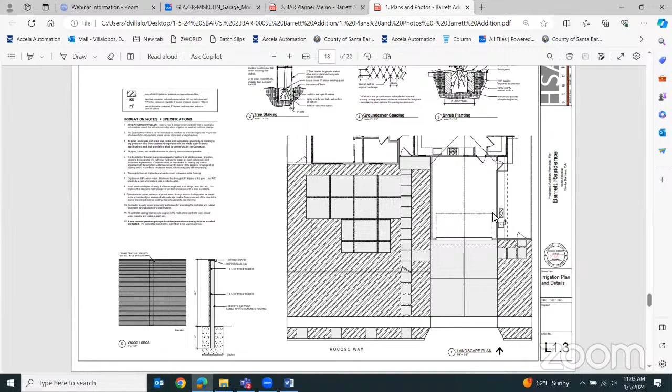Colors and materials, I think we need to go back up to the elevation sheet possibly. Yeah, which is not wonderfully rendered, but that's the... if you want to see it, I have a sheet with actual colors on here. We'll take it, you can just pass it down.

And then I saw in passing the light fixture. Oh yeah, I'm sorry, the light fixture looks compliant, it's on the detail sheet, so go down. There it is, yeah, up there. And the gate is just a pedestrian gate, right? There's no vehicular gate proposed, just a pedestrian gate, right? Okay.

All right, does that conclude your presentation? Any questions from the board?

All right, public comment? Public comment for item number 5, I don't see any. Okay? Can you confirm, David? Confirmed. Okay, it's hard for me to see the hands.

And we'll move on to comments from the board. Since this is minor, I guess, just only if you have comments.

State them. I just had one small comment. I was looking at the plant list and I would just recommend upsizing a few of those things, like westringias maybe, and some of the grasses from 1 gallons to 5 gallons. It's a little more money, but they have a much better chance of living.

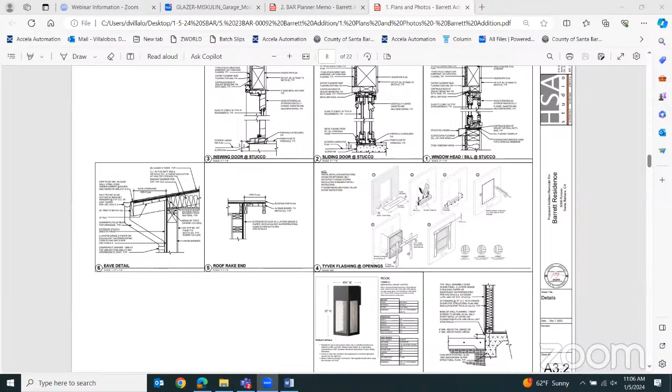Thank you, all right, moving on. Item 6, the St. George Residential Building at the request of Lonnie Roy, agent for Ed St. George. The project is located at 971 Embarcadero Del Mar in Isla Vista. It's for further conceptual review and prelim review of a 25-room residential building, approximately 10,196 square feet, divided between 5 groups. We have seen this before a few times, last seen on May 5th, 2023.

Lonnie, would you like me to read through the comments or do you want to go one by one? I can go through them one by one. Go ahead, and also kind of start with a little preface of why we're back for concept. If you want to go to the site plan sheet, sheet A1-1.

State your name for the record. So my name is Lonnie Roy, I'm the agent for the property owner, and with me also is Ed St. George, the property owner. So on this sheet, the reason we are back for concept is the project was about to go to hearing for approval of the development plan, and Public Works threw a last minute comment where they said they would no longer support the driveway on Embarcadero Del Mar.

So essentially the site plan rotated counterclockwise 90 degrees, and the driveway is now coming from Trigo, and the building is now facing Embarcadero Del Mar. And then the building itself, once that rotation happened, was mirrored on the east-west axis to maintain the office at the corner street intersection. So because of that change, they wanted the project to go back for a concept, to be sure you're still supportive generally of the project.

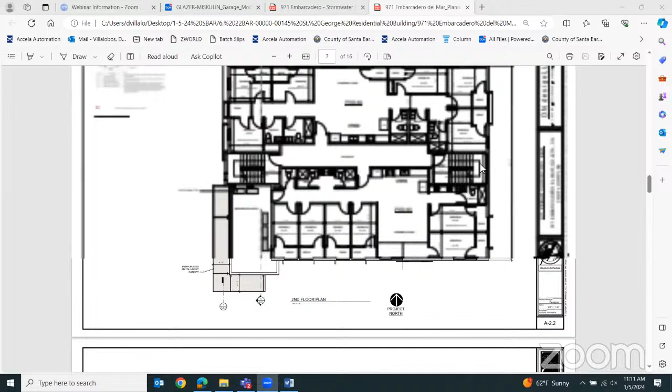And then on the rear carport side, there was a comment or suggestion to extend those columns. If we go back to one of the floor plans later, you'll see we've deepened those columns to make them feel more structurally sound, because before they were pretty minimal. There was also a suggestion to add a trellis feature, so we've added that trellis feature on the outside, and the landscape plan has vines that will grow through it. Those are the changes we have made to address the comments.

Yeah, looks like you did address them. Okay, we'll come back to questions from the board.

And zoom in on the east elevation. What's the material on the tall dark element, the stairwell? It's just going to be plaster painted in that iron ore gray. Yeah, correct. So that's plaster. Correct.

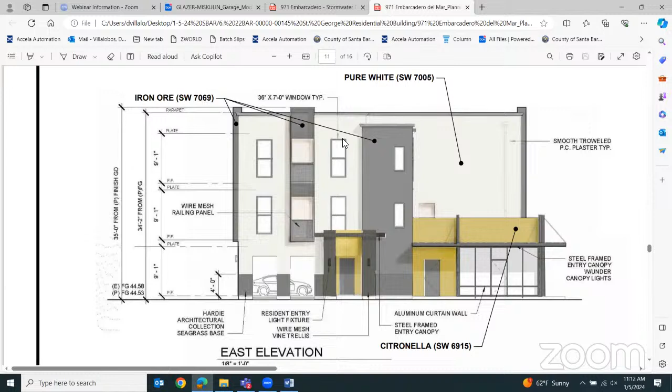Question there, but the other element, that's an opening, right? Isn't it like a little patio, or am I getting confused? Correct. So on that elevation, the white that's behind the wire mesh railing, that's further back, about 5 or 6 feet. The black portion above that would be in the outer plane. So we're talking about that, right? I think I saw it. Correct, yes. So that is indented into the building.

It's confusing to read because the elevations are at 1/8 inch scale, so that's small, we really need to see them big. And two, what it says as east is not actually east. And on top of that, drafting-wise, that would be a dark space, right?

The space in that is metal. When it says iron ore, would that be plaster or would it be some kind of metal grill? Isn't it like a balcony? Isn't that what that is? So that would be plaster, just painted that color. The railings themselves are a metal wire mesh, which would have a more substantial frame.

But which one is plaster? I mean, from this distance, it all looks the same, all gray, but something is plaster and some is metal mesh. Is that what you're saying? Where it says iron ore is plaster, and what's circled on there, that is the railing, that would be the wire mesh. Okay.

And well, I guess that's it. Yeah, can we go through the landscape real quick, which you had last time?

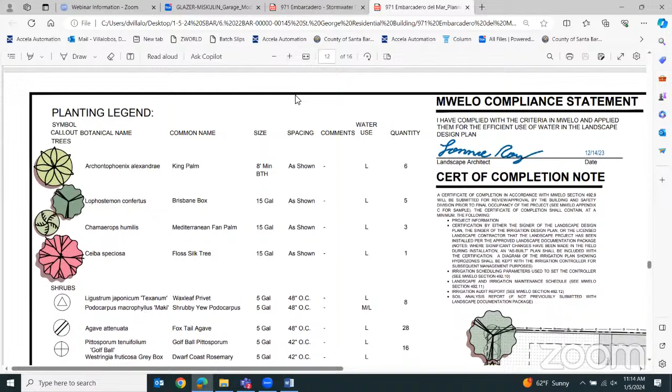So essentially it's the same plan and program, just flipped. There were some changes to quantities and items with the change of direction, but we still have the alternating palm tree and vertical trees along the drive aisle, the accent tree along Embarcadero Del Mar, and a few other palm trees along there. So it's more of a coastal palette.

I have a question. When you rotated it, it's not exact like for like, because one dimension is bigger than the other, right? Like do you have more parking space, or what do you think? They're almost the same. The flip was slightly smaller due to how the right of ways impacted it, so the building decreased by 100 square feet, but they are virtually the same. It's pretty much a square parcel.

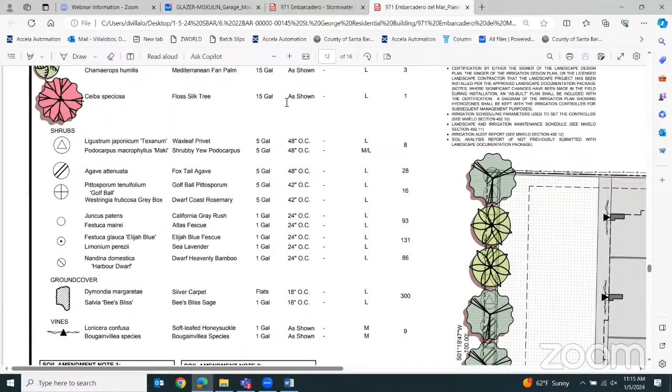And it's as far against Embarcadero as possible, the building, or what's the story there? How did you choose to put more landscape space versus back versus the front? It is as close to Embarcadero as it can be without changing the building from how it currently was, because Embarcadero Del Mar curves, the setback curves, so we do have more space potentially at that corner where we could have bumped out the building, but we didn't. We just rotated it to that pinch point.

So there is more landscape space in front of the building now, on that larger frontage. We wouldn't have a problem, hi Alex, we wouldn't have a problem if you want to move it another 10 or 20 degrees towards the road. That's the board's choice or desire, if you want to move it at the same angle as the street somewhat, we kind of discussed that. We don't have a problem with that, but I think it works the way it does now. That was something we discussed.

Okay. Other questions?

I just have one to clarify, when we're cross-referencing the planting you're proposing at the intersection corner - is it just Dymondia and Salvia Bees Bliss? It's going to be a high traffic area in the parkway strip, not the park - I guess the inside, as the sidewalk wraps around on the property side of the sidewalk. I think there's 3 plants, let me look at my plans real quick.

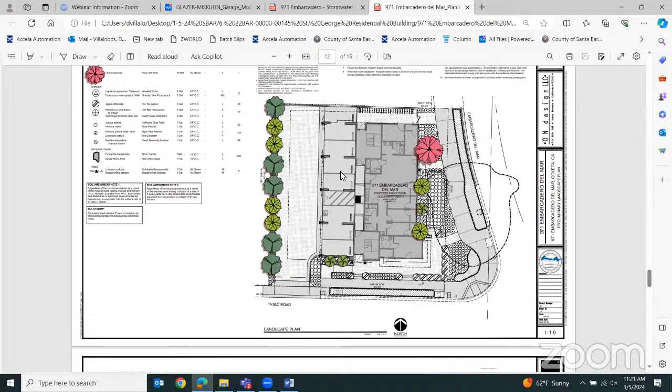And then, as Kaylee alluded to, maybe reconsider some of the plant species chosen in the high traffic areas - they will get trampled and may not last, and you don't want that to end up as dirt. Can we go to the landscape plan actually? I was also wondering how much longer that ficus is going to be there, and if it makes sense to plant another tree here to get one started.

That may help to define that space. And then lastly, trees throughout, I think could be thought through. Odd numbers are typically better, so I would consider doing single here, and then 1, 2, 3 of something. The 2, 2, 2 thing, it'd be nice to randomize that a little more, but that's just a suggestion. Otherwise, I think you're looking good.

I'll add mine here since my comment was directly related to Chris's. I generally find plants that can handle being stepped on without snapping off are more durable, like clumping grasses and things like that. Thorns are good ideas too, but some plants specifically can't handle anyone stepping on them.

Okay, then we'll carry on with more comments. Alex? Yeah, I think the project keeps improving. I would like to see next the quarter-inch scale elevations, so we see more clearly what exactly it is that you're proposing.

I'd like to see something on the rooftop, the carport area. I think it's going to be pretty important in the sense that it's going to be very visible from the units, right? So maybe something can be done there. In terms of what the plan is, I don't know, but there is a page with a rooftop.

If you keep going down, you'll see there's a page with the carport rooftop. Keep going—there you go. What is this? So, the big space, that's all above the 3rd floor, and then the space in the bottom left corner is above the 1-story office mass.

And the carports, where are they? They're underneath the second and third floor, underneath the building. Oh, okay, I get it now. Okay, scratch that comment.

Right now it doesn't, but we can do that. It's just kind of on the building. The building's about—so the only rooftop you're going to see is the one on the lower left-hand side. Okay, all right, scratch that, yeah.

Yeah, bring quarter-inch scale elevations. I'm not totally sold on the colors. To me, it looks like a wasp, like black and yellow. I'm not sure exactly how it fits into the IV, but anyway.

Okay, I'll pass on. John? Yeah, I think the rotation and the addition of more landscaping on the Embarcadero front is beneficial. But I also think that south elevation, on the right side, as Chris pointed out, is stark and needs something—either make all the windows the same or change the color of it. I think, is that tree going to be really big?

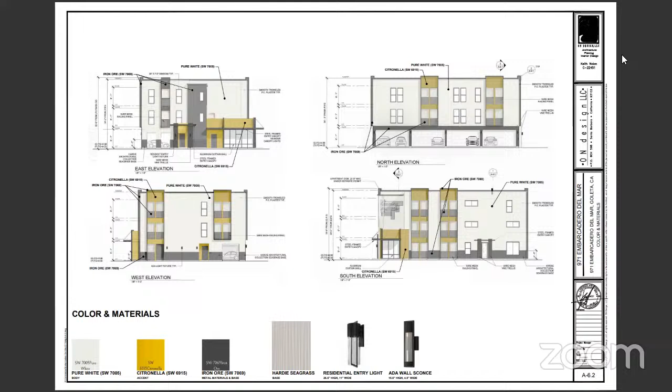I'm just a landscape person. But if we could go back to the landscape plan - I think this new orientation, it's hard for me to remember exactly how much landscaping you had in the last one, but it seems like it gives you more opportunity for landscaping in this orientation.

So I would take the opportunity to really study your plant composition on the Embarcadero del Mar area. I won't give too much direction, but I think you have a really good opportunity to incorporate larger shrubs and organized plant composition. In the parkway, knowing how much traffic goes through IV, maybe it's worth looking at clumps of low plantings that can handle traffic, intermixed with pervious paving materials, to allow traffic through so you don't end up with exposed drip tubing and old mulch where everything gets walked over.

And really studying the plant species in that corner to be traffic tolerant. I think there's something you could place there that doesn't hinder the sight lines but gives that corner some extra prominence and anchoring of the structure. And I think that's it.

Anything else? So this was here for conceptual and preliminary review. Does anyone want to make a motion? What's this, does it need a preliminary review before getting plan approval? I don't think Veronica's here yet. So you haven't received your discretionary approval yet, is that correct? I think it's just concept. So that would just be concept then. Do we need a motion, or no? Sounds like no motion, just direction on how to come back.